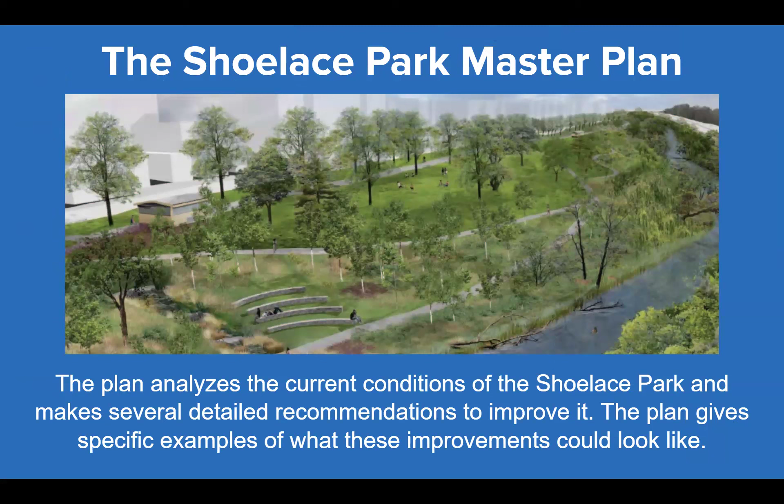The Bronx River Alliance has held walkthroughs with Bronx Community Board 12 in 2012 and 2021, assessing current conditions and having preliminary discussions around prioritizing projects.

It is historically on the bed of the original Bronx River Parkway, which was constructed almost 100 years ago, and has been reclaimed for parkland. Shoelace Park is located along Bronx Boulevard between 211th Street and 233rd Street in Bronx Community Board 12 and City Council District 12.

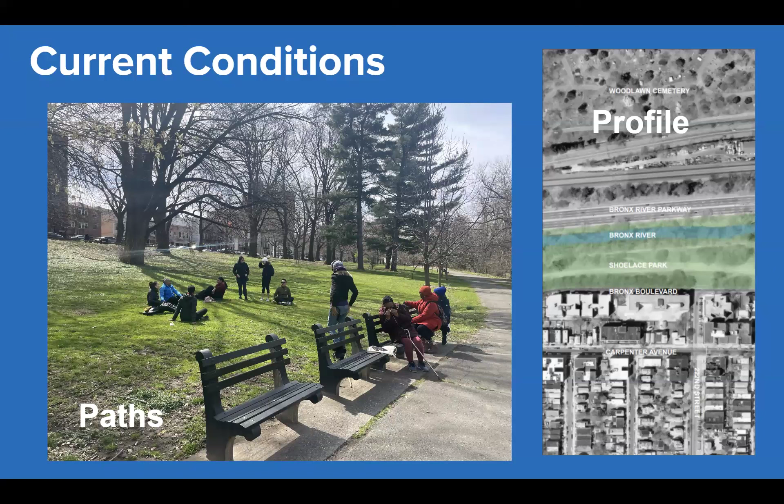There is some river access in Shoelace Park at 217th Street, by the Olinville Playground, where you can access the dock. We host some paddling programs out of Shoelace Park throughout the year. Some of them are free, some of them are paid. Our biggest event in Shoelace Park has been the Shoelace Park Showcase, which is a relatively new event over the last couple of years, and that takes place in October, provided it doesn't rain.

This is naturally how a river will function. And when all of our park resources are placed within the floodplain, they are at risk, both in the short term and the long term.

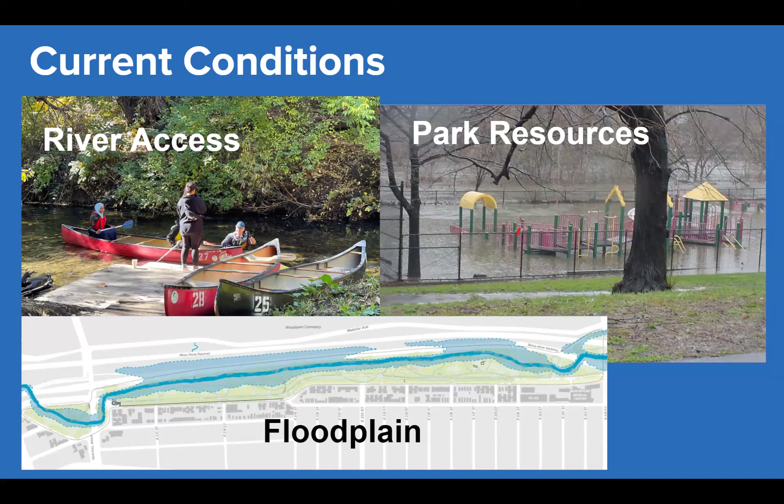The Shoelace Park Master Plan creates a list of recommendations to improve the park. The first is to improve park access and resources for the community. The second is to manage rainfall and flooding. And the third is to support the ecology of the river and the park.

So, improving access and park resources. This is the reimagined system of trails for Shoelace Park. It divides the trails into three different categories: nature trails, park walks, and the promenade. Currently, the park walks and nature trails blend together near the river, while the promenade is in good shape and has been refurbished somewhat recently.

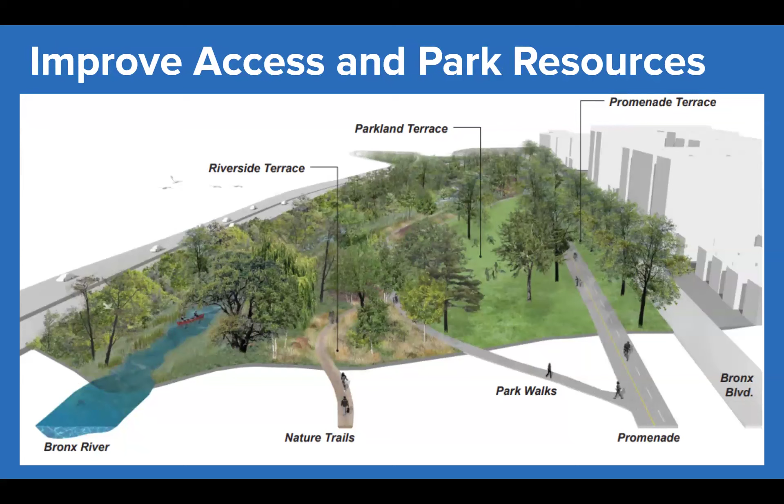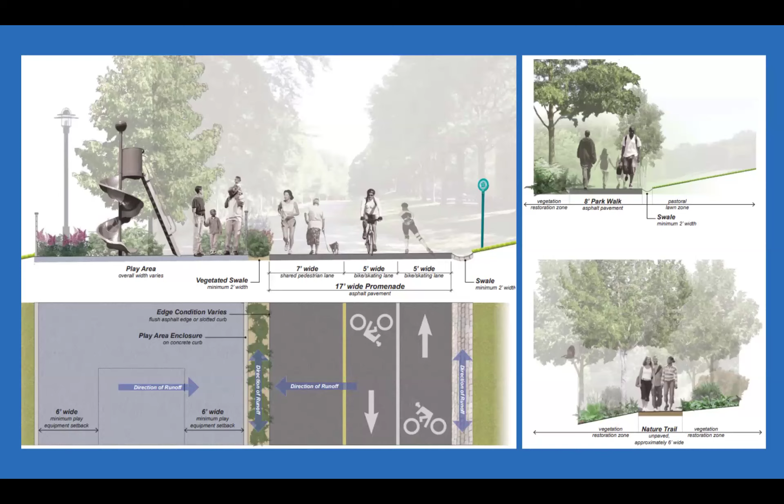The second goal is to manage rainfall and flooding. With climate change, rainfall has increased and rainstorm severity has become more random throughout the year. This can affect such a small park as Shoelace, because half of it is located within the floodplain. It's on a hill. There's lots of erosion, which makes parts of the park inaccessible.

The Shoelace Park Master Plan proposes a variety of stormwater best management features and practices that could help control rainwater and flooding within the park, as well as the swelling of the river during massive rainstorms. These include things like swales, which capture stormwater underground as it makes its way down toward the river. There are also trench drains along the promenade that will capture water and funnel it to a sewer system instead. Rain gardens can both act as pollinator gardens as well as areas that soak up additional water.

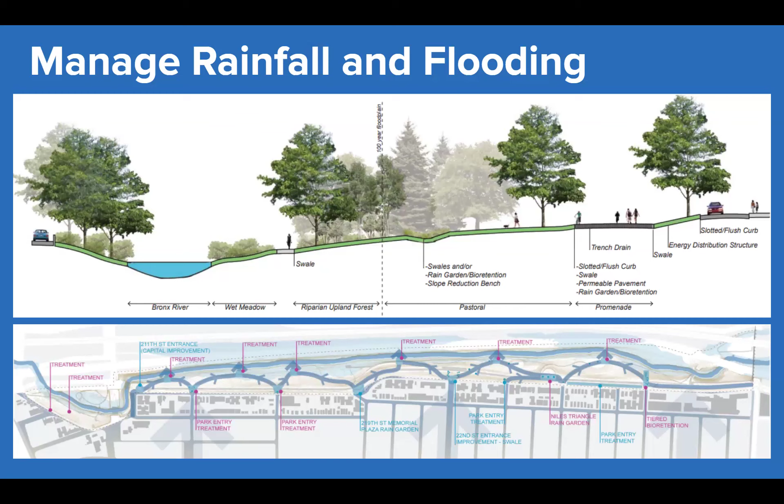There are dozens of different ways to increase the capacity of stormwater absorption. At the bottom, there's a list of different parts along Shoelace Park that have been improved, shown in blue. In pink, you can see proposed actions as well. So there's lots of opportunity to increase the amount of stormwater capture here in Shoelace Park.

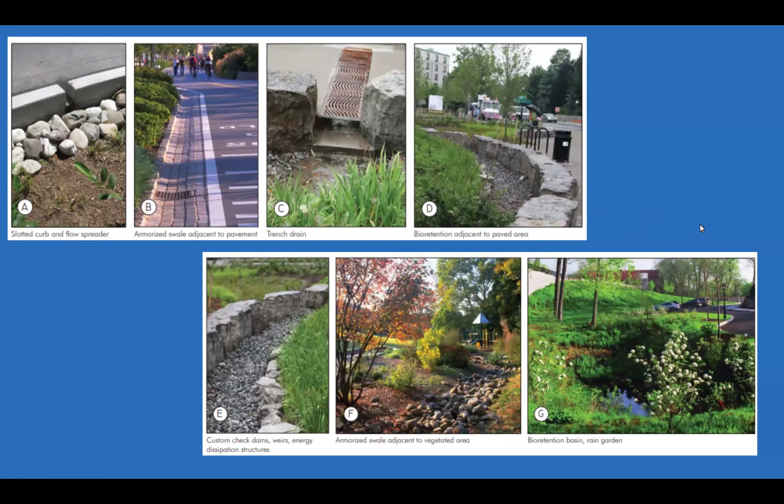On the bottom, you can see some more natural-looking features, such as bioretention basins or rain gardens, which can act as habitat as well as stormwater capture features.

And finally, there's supporting the ecology of the river and the park. Our green spaces are immensely important in the face of climate change. They are able to absorb heat and prevent urban heat island effect from occurring in localized areas. Supporting the ecology of the river and the park can also provide benefits to community members. Increased tree canopy can reduce the heat island effect in this park.

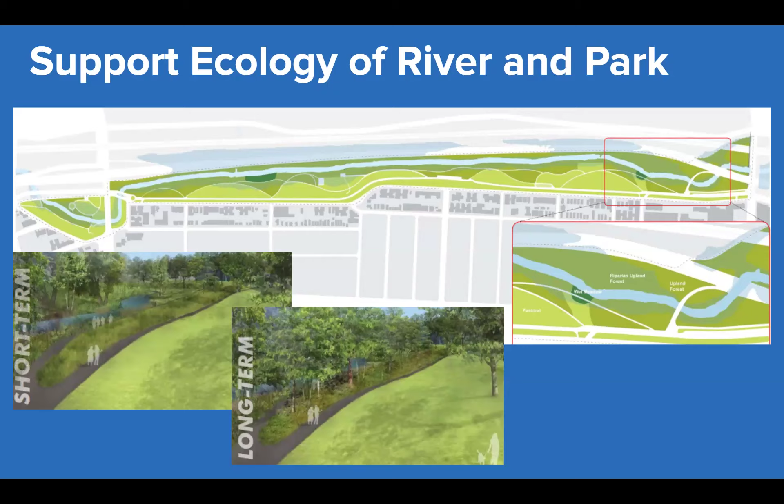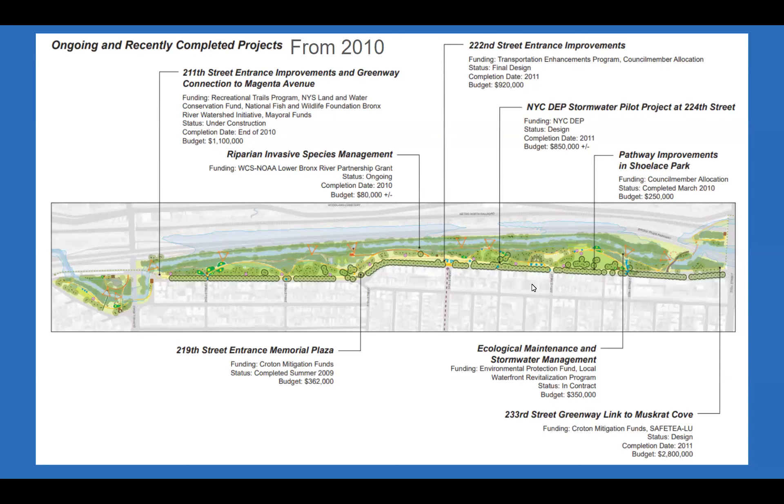So what are the next steps? The next steps are to work with the community board to prioritize project recommendations from the Shoelace Park Master Plan. Then, once those projects are prioritized, we work with the Parks Department and elected officials to access funds and advance these projects.

We hope we can work with community members in Community Board 12 and Council District 12, and those who use Shoelace Park as a haven, as a getaway, as a way to get around their neighborhood, to improve it for the future, to make it more climate resilient, and make it a feature of the neighborhood itself.